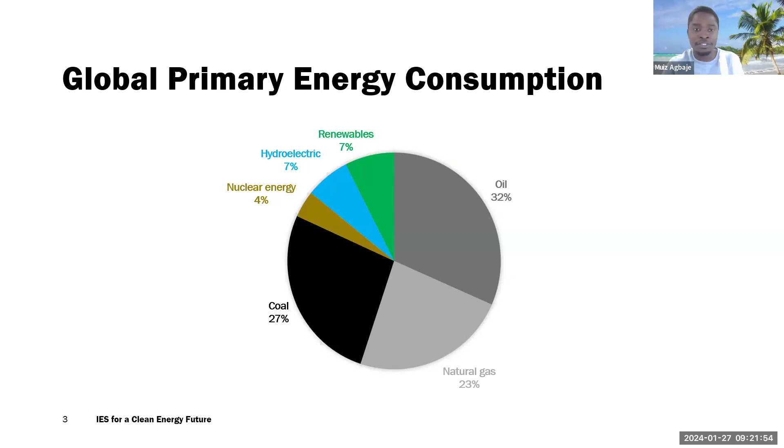We're not trying to victimize anyone, we are not trying to victimize coal or oil or natural gas, but we are saying we need to do more in terms of clean energy. That's just what we are saying here. Let's do more for clean energy systems based on what we have here. So what are the challenges we are facing in the current energy landscape? By energy landscape, I mean what we have now in the world, the energy systems in the world.

What are the problems? A lot of energy systems, the transmission distribution system, have been built like 40, 50 years ago. They aren't really new transmission systems. So these things are really old. We need to build new ones. Most of these things have a lifespan of like 50, 60 years. So in the next 10, 20 years, some of them will start getting out of phase. We have to build new ones. So those are challenges we are facing.

Because they are old, and because the technology they used to build this thing is old, there are losses. A lot of losses are being incorporated in the systems, and we need to reduce these losses. Of course, that's due to the age, because it's been a long time. We need to build a new one. So it's aging, they are dilapidating, and there are lots of losses incorporated due to the age of the infrastructure itself and due to the technology used in building it.

Also, there's what we call the energy access disparities, which I believe a lot of people from third world or maybe second world countries will understand. Not everyone has the same level of access to energy. I know some people can relate here. You have energy access, you have like maybe 4 hours of electricity in a day, or maybe 10 hours. So we have these challenges we are facing, and we have to deal with it. How do we deal with it? One of the ways of dealing with it is building infrastructure to exploit capacity in the energy systems.

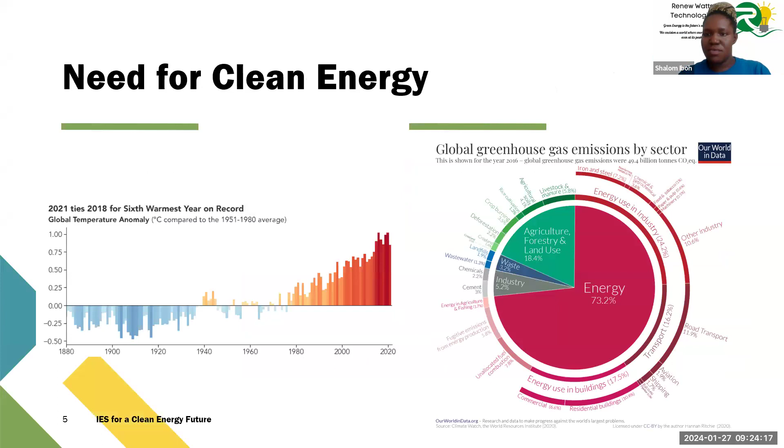Sorry, 1 second. Eperechi, I've been trying to mute you, but it seems like it's... Okay. Okay. So moving on.

Just to buttress what I've said before, I'm trying to wet the ground, like we like to say, to let you see why we need this energy, to let you understand what is going on in the world today. When people start talking about climate change and greenhouse gas emissions, they are not just numbers. Not that some people just came up with these things. There is actual data for these things. We have evidence to support that these things are happening.

So one of them is the global temperature. Like, what is the average temperature globally? So we can see from the 1980s till now, we have a steady increase in global temperature.

If... Nothing, nothing. That's no joke. Nothing. I've not seen it.

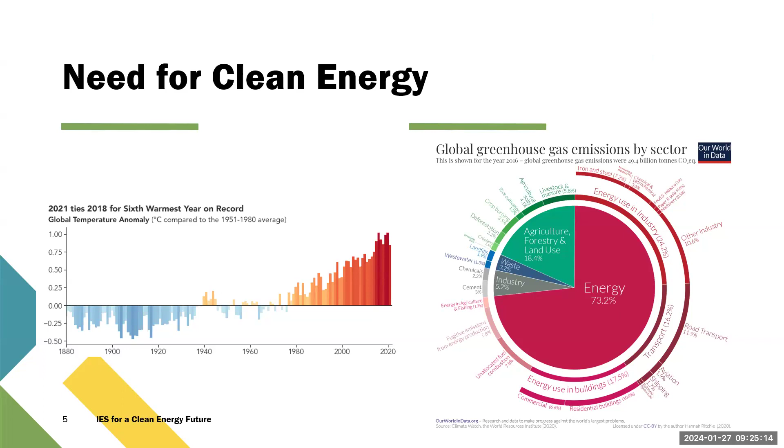Okay, Zoom is not talking to me then.

So we have a steady increase in global temperatures. So these are the things that are pushing us towards clean energy, right? So we have the large consumption of fossil fuels, which gives us a very large amount of CO2. Then this large amount of CO2 leads to global greenhouse gas. Of course, CO2 is the greenhouse gas emission. Then we have this increasing the global temperature. So we have noticed there is definitely an increase in global temperature. There is no doubt about that.

Climate change is real. We know that. We've seen a lot of things changing in our weather and other stuff like that. So these numbers are there. The evidences are there. We have to do this. But now, to give more insight into the cause of greenhouse gas, 70% of greenhouse gas emissions is from energy. So energy has a lot to do in reducing climate change and reducing greenhouse gas emissions.

Of course, people will come and tell you we also have greenhouse gas emissions from agriculture. Yes, it is there, but it's very low. Imagine you reduce energy greenhouse gas emission by 10%, for example, and you reduce agriculture greenhouse gas emission by half. It's almost the same thing. Now think of, you go all the way to half for agriculture, but you just do 10% or maybe 20% in energy, and you already have a large decrease. So that makes you understand how important energy is to reduce climate change, basically.

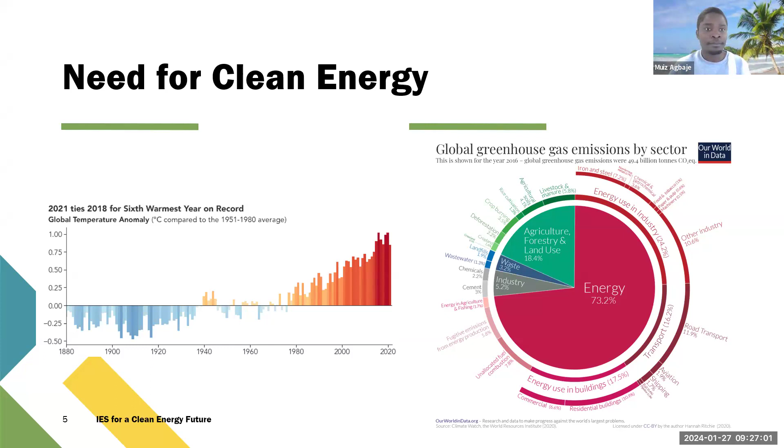So we have to work in terms of energy. We energy professionals have a lot to do to reduce these greenhouse gas emissions and of course combat climate change. So now to properly what we are here for today, we've talked about why we need to do all these things. We've talked about what is going on and why do we need clean energy? What is the motivation for this? But the clean energy we are talking about here today, we are talking about integrating these energy systems for the clean future. So what do we mean when we say we are integrating energy systems? What is the ideology behind it?

So the idea is you design a power plant for more than one thing. You don't design a power plant for just electricity generation. For example, you have a solar PV system, you just use that solar PV for electricity and that's all, have a good day. No, that is not integrated. The idea behind an integrated system is to have multiple energy inputs, multiple users, and multiple storage options. So you have a lot of things coming together. And the good thing about having so many things come together is you use the strength of some to combat the weakness of the other.

So when you have a system that is not working at a particular time, you definitely have something else to cater for that kind of need. When you have high demand, you have several systems to cover for that high demand. When you have low demand, you have a storage system to take care of the excess energy generated. That is the idea behind integrated energy systems, to have several inputs, several users, several storages. So inputs could be the energy sources. You have renewable solar, wind, you have hydropower, you have nuclear, you have geothermal sources, you have several sources.

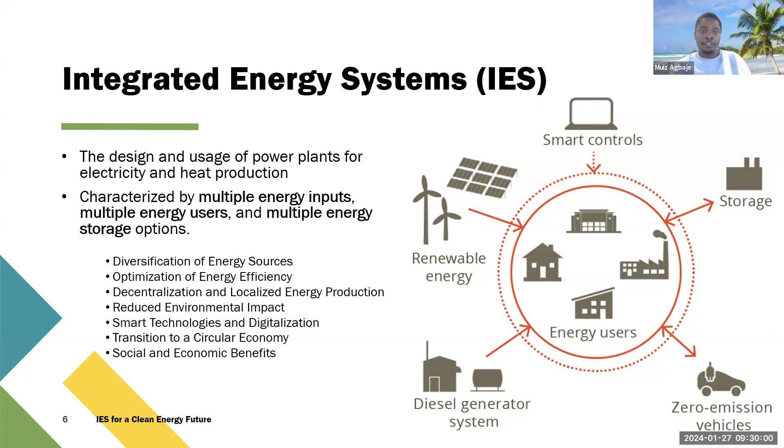And then, of course, we have the social and economic benefit like job creation and stuff like that. And of course, the main reason for doing it, the reduction in environmental impact, the reduction in greenhouse gas emissions and CO2 production.

So why do we want to do integrated energy system? What are the benefits? So I like to summarize my benefit under just these 4 things. These 4 things cover practically everything. You want to improve the efficiency of the system. You want to enhance the reliability and resilience. You want to reduce greenhouse gas emissions, and you create jobs and other economic benefits. Outside these 4, every other benefit of the system is just related to this. As far as I understand, when you look at it all the way, it boils down to these 4 things.

You improve the energy, you improve the efficiency, rather. Everybody that wants energy gets it at the time they want it. Energy you create is not wasted because you have storage systems, you have other users that you can serve. Resilience and reliability. Resilience means the system will withstand anything at any point in time. Reliability means when you want the system, it is there for you. So a well-developed integrated grid will definitely give you this.

And of course, greenhouse gas emission reduction, because the sources we are using are clean sources, or let me say, renewable sources, sustainable sources. Yes, we can have people that would argue that even your solar panels, when you use them or when you create them, you have some CO2 emissions. But when you bring the numbers and compare the data, if you check the life cycle of solar panel production and how much CO2 is created, compared to a typical fossil fuel power plant, look at the life cycle of both, and then you will understand that people that are against clean energy are just looking for excuses not to adopt this technology.

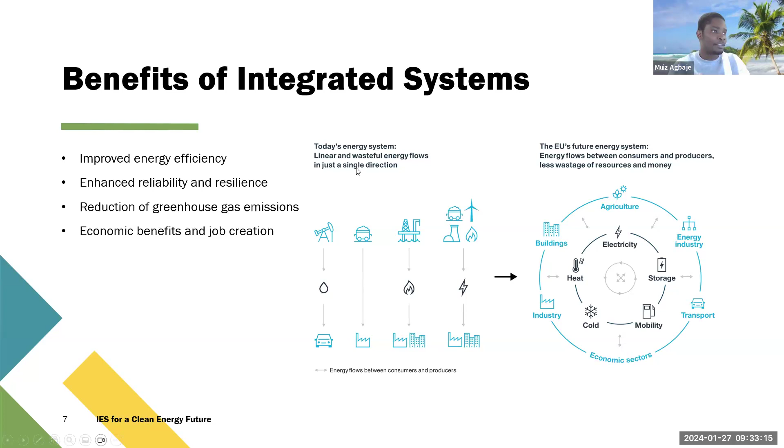There's a linear interaction. But in the actual future of energy, what we want to have is a centralized, circular transaction where systems can interact with each other in both directions. So you have everything in a centralized system. You have energy production and storage. Everything connects to the energy user. So users can take from wherever they want at any point in time without having to lose. That's the idea of the reliability and resilience of the integrated energy systems.

So we've been talking about these systems. What makes up an integrated energy system? What do we see to say this system is integrated with other systems? So these 4 things also, I like to summarize into big headings. We have heat and power systems, renewable energy sources, energy storage and smart grid. So the CHP systems are basically all your energy conversion systems: how much energy you can convert, what are your converters, and then your sources, your storage, and your control.

So you definitely need energy sources. You definitely need energy storage, because when you have excess, somebody has to be there to take that excess. When you don't have enough to supply your end user, somebody has to be there to fill that gap. That is what your storage does. Then your converters: we can't use the heat of the sun to power our television. It will not switch it on. So we need converters; it could be your turbine, your heat engines, any type of converter you could think of in converting energy from one form to the other.

The heat from your nuclear, or even the wind, the wind turbine itself is an energy converter, because what you're using is kinetic energy of the wind, and you're converting it into mechanical energy, then convert that mechanical into electrical energy. Then that electrical energy, you can convert it into another thing, maybe hydrogen, or you can convert it back to heat energy, depending on whatever you want to create at any point in time. That is the beauty of the system.

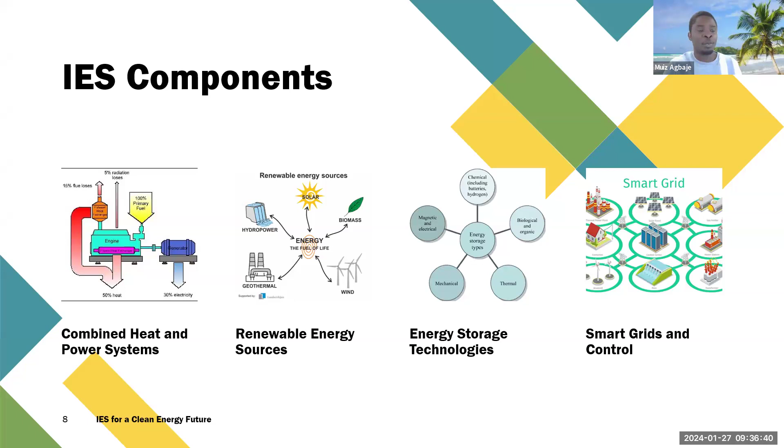So we've talked about what we mean by integrated systems. We've talked about why we need integrated systems. We've talked about what makes up an integrated system. So to summarize this whole integrated system, these are the parts in the system. You have electricity and heat. That's like the most used form of energy by any end user. So your electricity could be supplied by your solar, by wind, by hydro, or nuclear. Your heat could be supplied by biofuels, nuclear, geothermal, and solar thermal.

Then your energy storage technology, like I mentioned before, you have hydrogen storage, you have thermal energy storage, then your converters and your end users. So in a typical integrated energy system, you have these constituents. You have electricity in one form or the other. You have heat in one form or the other. You definitely have to store your energy, and you need your converters from one form to the other.

So now I want to go into a few examples. I mean, I've been talking all day long, trying to sell this idea of integrated energy systems to you. But then how do these things work? How do they move together? How do they cohabitate to give us what we want? So one first example I would like to give is a solar and wind-based integrated energy system. So you have your solar panel, you have your wind turbine. Then you want to use this as an integrated energy system. What are the things you need?

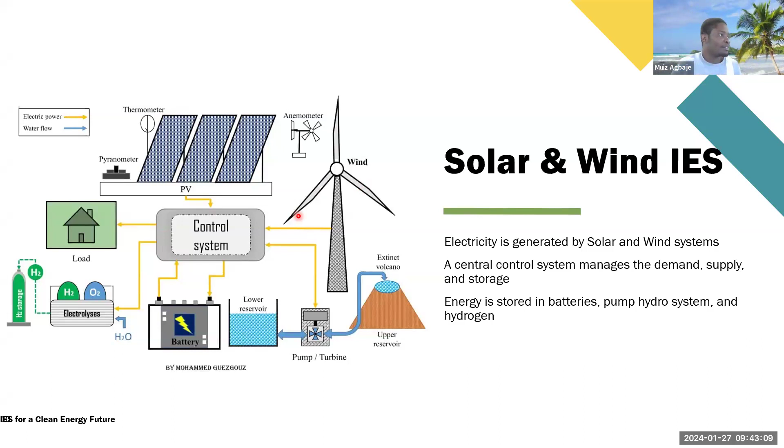Yes, I think so. So this is for a solar and wind-based integrated energy system. I want to give another example. Okay, good. So here, this is what I like to call a multi-generation integrated energy system. We have more than one type of energy source. In the previous one, we have more than one source, solar and wind, but they are both electricity. But here we have more than one type.

Do we have a question?

Okay, before I go to the CHP, let me just talk about hydrogen. Yes, hydrogen, that's why I said a lot of hydrogen technology is still under development. It is quite expensive right now, but now the cost is actually reducing, to be honest.

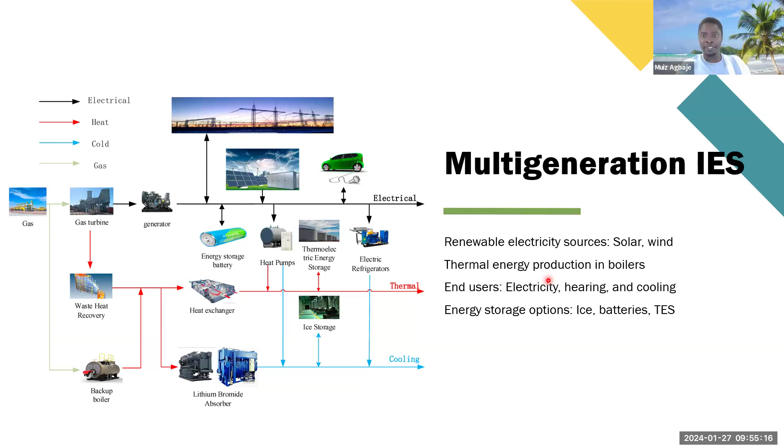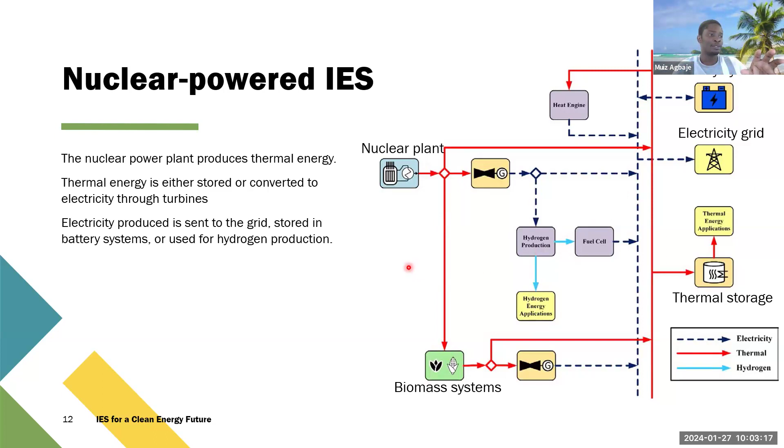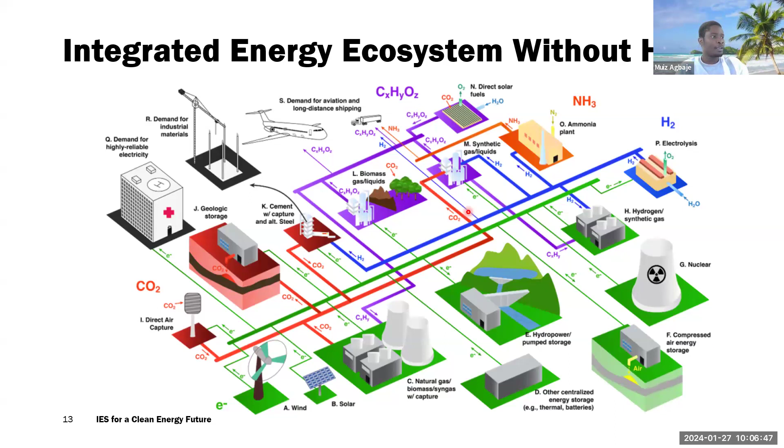So moving forward, I will give these two examples of actual systems working, just to let you know that, of course, it is complicated. Of course, it might be expensive, but some people are actually putting a lot of work into ensuring these things work. So the University of California, San Diego, they have a microgrid. The microgrid is just a smaller grid. I believe everybody knows what a microgrid is. You have a smaller grid serving a very localized community, like a university. You generate all your energy, you store all your energy, and you control everything by yourself without dependence on the national grid. Another one is district energy in Malmö, Sweden.

The Europeans are the champions of integrated energy systems, like it or not, because I think the Europeans like to try things a lot. But here in the US, we want to test. So a lot of systems we have here in the US are probably in the universities and maybe some small research institutions or some national labs, where we keep testing to see, will the people accept this or not? Will it work? But in Europe, they just try, okay, one, two tests, oh, that works, let's send it out. Everybody starts using it, then they learn on the job, which I think is better if you ask me.

So in Malmö, theirs is more advanced or more complicated than what they have at UC San Diego, because they include both electricity and heat. They have biogas, they have geothermal energy. Geothermal energy is also something that I really like, but I can't really talk much about that here. So what I'm trying to say is, these things work. These things are being used. People are actually looking into these things, and you definitely want to explore it if you are an energy enthusiast, a clean energy enthusiast, if you are interested in renewable energies. You have to at least know what integrated energy systems are like. So that's it on integrated energy systems, how they work, how they combine, and how things work together.

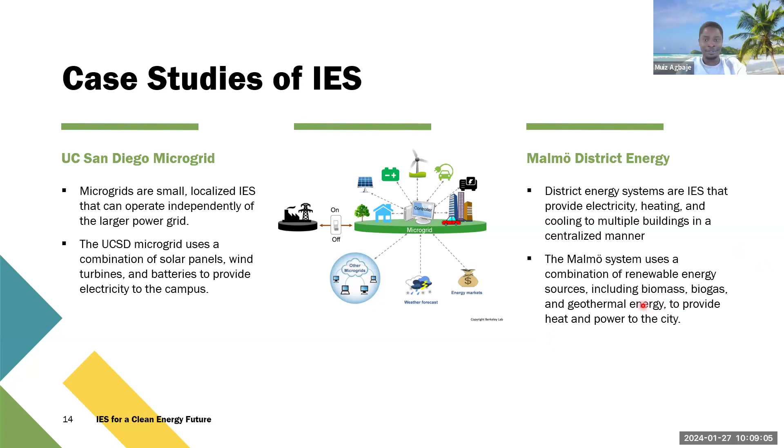Sorry. So the challenges of the system. So what are the problems we're having? Like I said, renewable sources are not stable. And these systems are very, very expensive. And because we don't have much knowledge on them, we don't know how long it will take to pay back. So the economics is a problem, and the technology itself is also a problem. They are complex technologies. We don't really have much experience with them. So that is a problem. And also they are quite expensive. And of course, we need the government to support them. Those are the challenges we are facing.

How do we plan to fix this? What are our intentions on fixing this? Improve technology, of course. Let's get technology to an advanced level where we can actually implement the system. That is where I come in. We work on the technology. We try to see how we can improve the systems to make sure they are resilient, to make sure they are reliable, to make sure they improve efficiency and stuff.

And then the government can come in by giving us money, provide financial incentive and support mechanisms to make this work, then the partnership between public and private institutions and other things like that.

So yeah, I'm going to have to rush the remaining part because I've spent so much time.

So policies that the government could do to support this is to provide, as I said, financial incentives, then regulations based on the performance. So if you have a system that works well, provide regulations to improve the system. You support R&Ds like they are doing to us, and then other things like that: feed-in tariffs, net metering, emissions trading schemes for the carbon capture thing, where you pay for CO2 that is emitted and stuff like that.

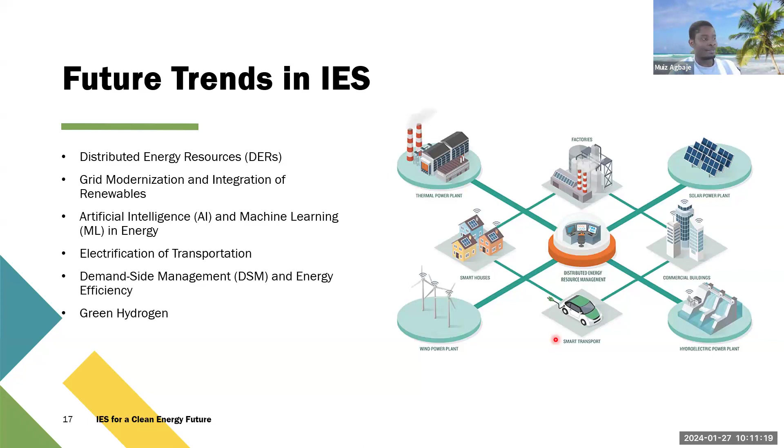And so to conclude my whole talk today, we know that we have to transition to clean and renewable energy sources if we want to fight climate change. Integrated systems will definitely support and advance the Clean Energy Future Initiative. We need to combine heat and electricity, and we definitely need smart grids to enable integrated systems, because just one guy is not enough to do it. Then, of course, we need the support of the government, policy and regulatory framework.

So as an energy person, you don't have to always deal with technology. You guys can go into government and enable these things, because nothing makes any technology work faster than the government being in support of it. And of course, from what I've said, I've tried to explain to everyone that adopting integrated energy systems will help accelerate economic development of underdeveloped and developing nations.

With these few points of mine, I hope I've been able to convince and not confuse you that integrated energy systems are the enablers, the powerhouse of the clean energy future.